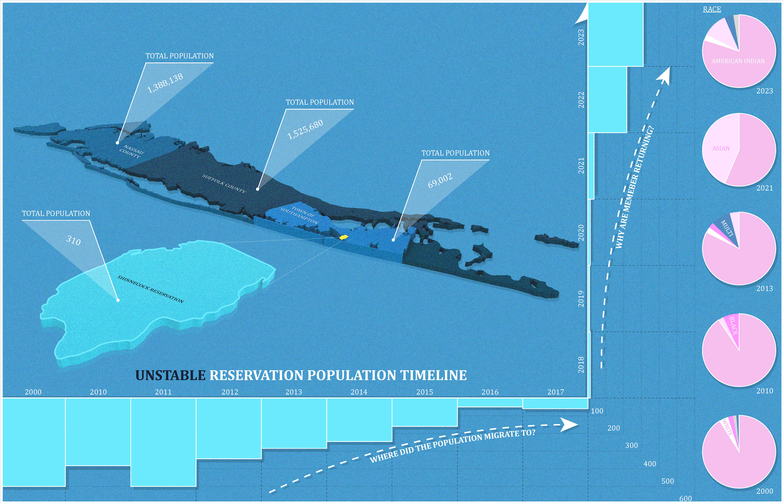In recent years, the reservation has faced unstable population totals. The reservation has also faced a decrease in child population percentage when compared to the total population, and an increase in the median age of the people living on the reservation.

We believe this could be due to the income pressures facing the reservation, where younger generations are moving away to find work, and the people struggling that are living on the reservation are having trouble sustaining families. This income disparity is due to a lack of local economy.

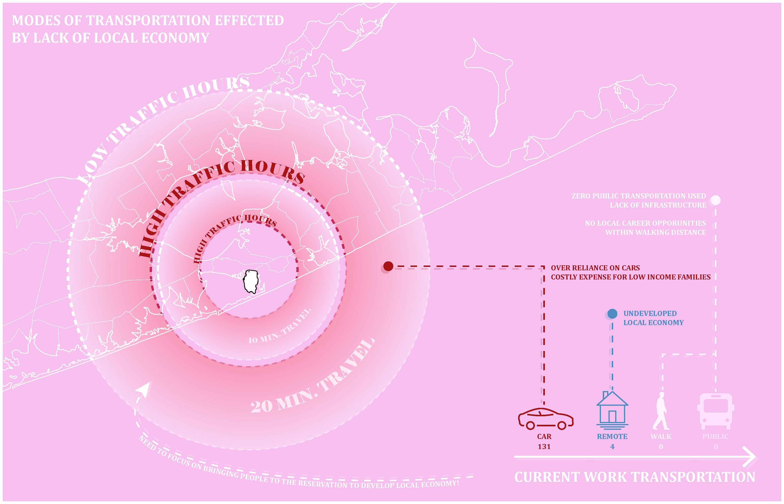This could be seen in the modes of transportation used by the people living on the reservation. Almost all of the employed workers that live on the reservation have to commute by car to get to work. There's no local career opportunities within walking distance, and there's an over-reliance on cars, which is a costly expense for low-income families. So how do we bring people back to the reservation and support future growth of the population? And more refined, how do we support the growth of the Shinnecock Nation through architecture?

The Shinnecock Nation has a lot of similarities to the architecture that's built on Nodeul Island in South Korea. There's a main intersection point in the middle of the island, similar to the Montauk Highway on the Shinnecock Reservation. We can use the Nodeul Island's blueprint for how they set up program density on the Shinnecock Nation when creating a master plan.

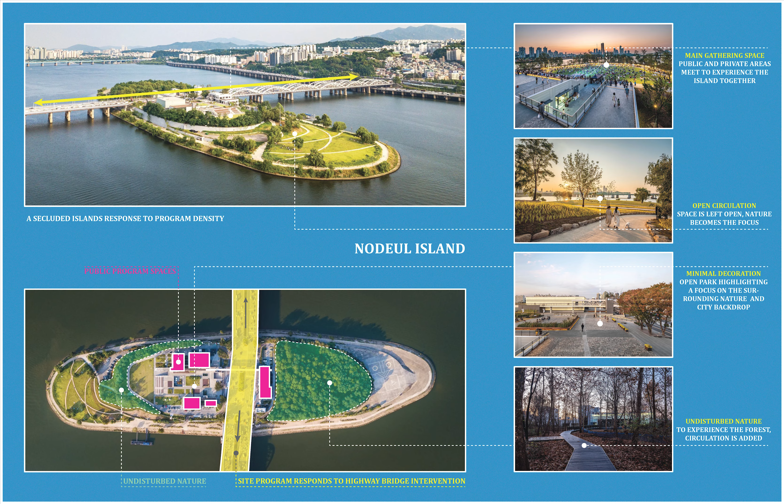As you can see, from the site intervention point in the center of the island, the main program density is larger closest to the site intervention. And as you move outwards towards the edge of the island, the forest density increases and it focuses more on creating circulation paths and undisturbing the nature, creating gathering spaces to actually experience this nature, and creating more privacy as you extend out towards the edge of the island.

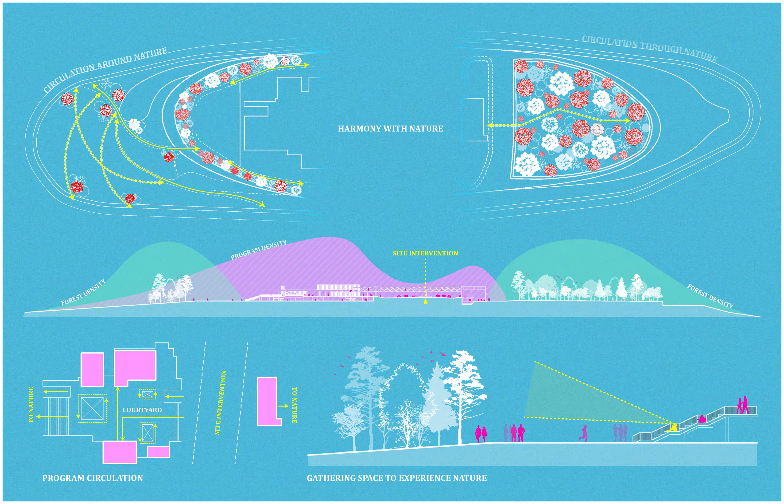When applying the same logic to the Shinnecock Nation, where we use the site intervention point of Montauk Highway, we can create a larger program density closer to the highway, focus on creating a commercial district that focuses on bringing people from the surrounding areas into the Shinnecock Nation to stabilize the local economy.

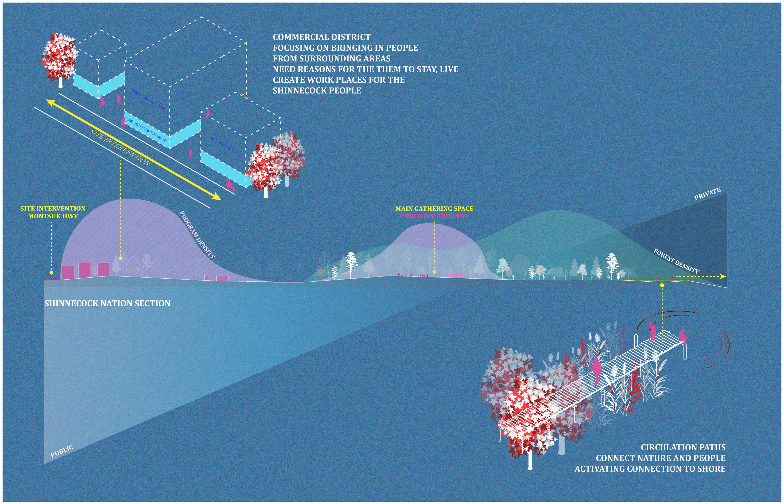And then as you move outwards towards the edge of the Shinnecock Reservation, you focus more on circulation paths and creating more privacy areas for the Shinnecock Nation to create a barrier between the outside people coming into the space and where they actually live. And then similar to the Nodeul Island, have a main gathering space where people from the outside and the people in the Shinnecock Nation can meet and gather and have events and share the space together.

This main gathering space, the powwow grounds, became the focal point of my design for this semester, as a starting point for the master plan.

When visiting the site, we noticed that there was undeveloped parking, non-permanent seating, and a worn performance center, creating this desolate condition for the powwow grounds. When not in use, the site is completely unactivated. So we're looking to change that.

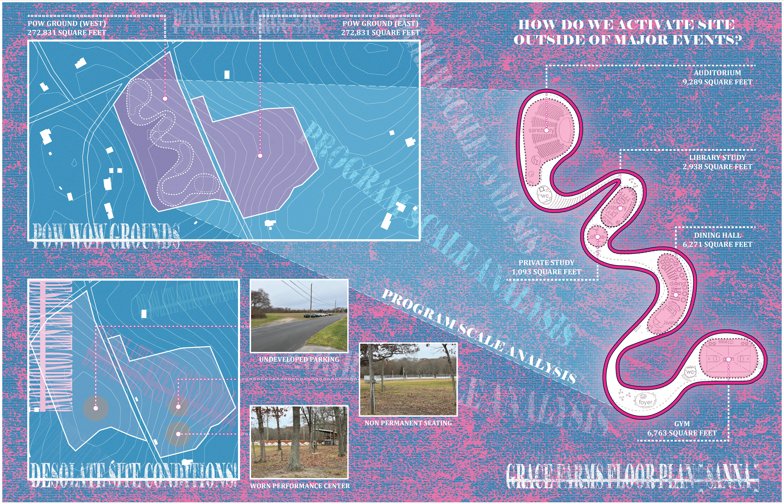So when thinking about how we're going to actually activate the space, we looked into the type of events that the Shinnecock Nation currently has, like the Shinnecock Powwow, Indigenous Day, Senior Clubs, the Oyster Festival.

Then we looked into other parks like Central Park, the High Line, and see what type of events that they hold that we might be able to incorporate into the program spaces at the powwow grounds, like stargazing, salsa bands, Halloween events, special screenings for artists, and craft making for children and families.

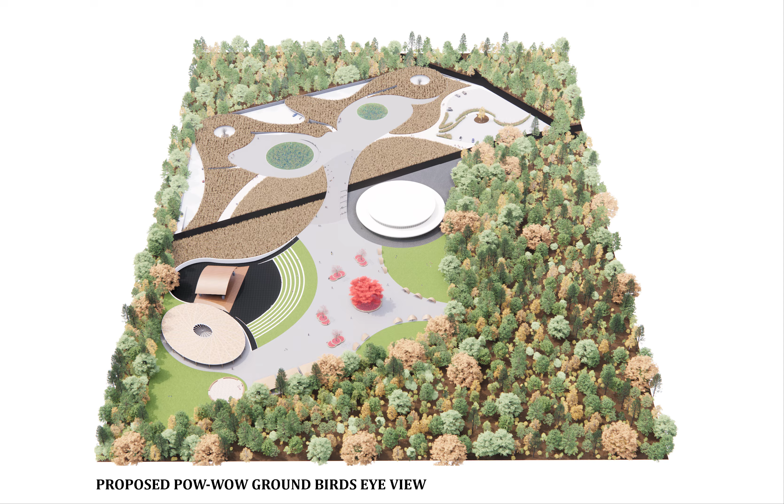We also completed a water runoff analysis of the current powwow grounds to help drive some of the design choices that we use for the space. We used all these factors when redesigning the entire powwow ground space.

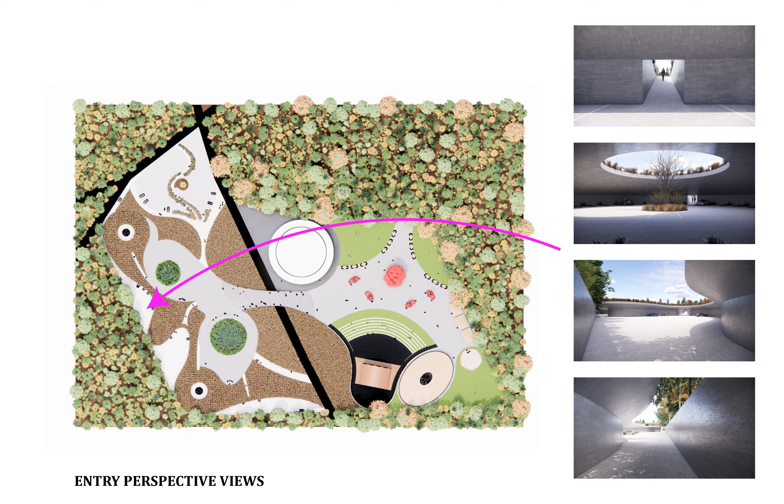We started by redesigning the west side of the powwow grounds. Instead of a flat, desolate parking area, we wanted to create an experience that people could travel through this space and experience it throughout the year. By creating these buried areas of parking, we allowed an experience of circulation entry into the park space. So the parking almost becomes part of the experience.

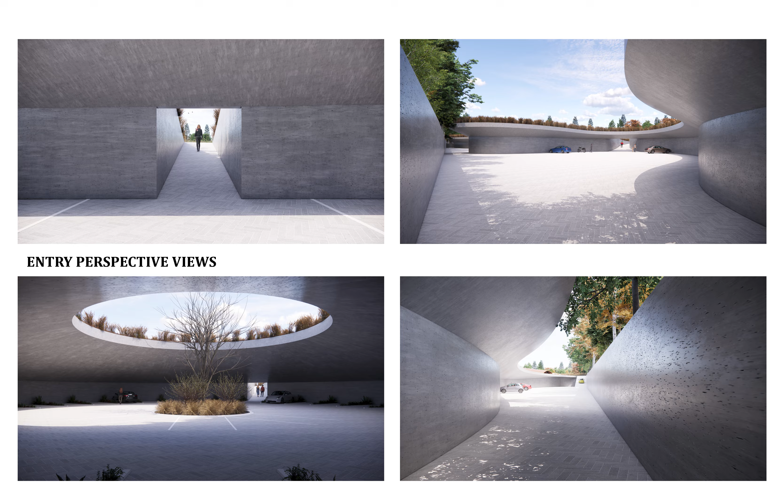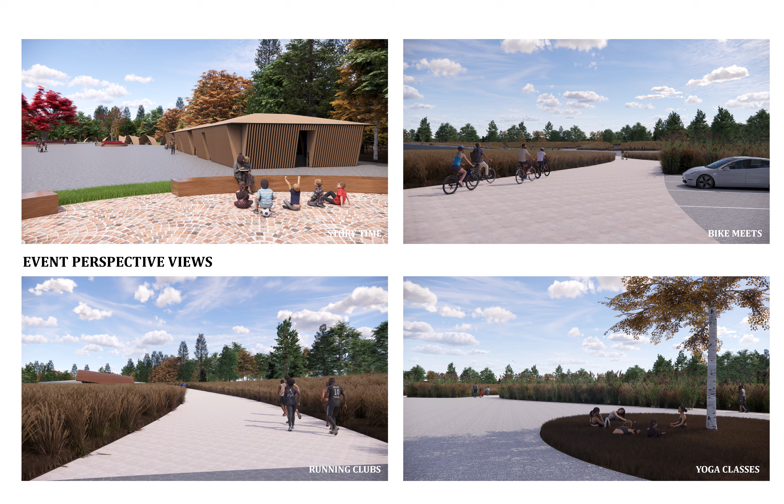By redefining this area, we create opportunities for people to create events like bike meets, yoga classes, running clubs, and story time. Other events in this area can include stargazing, defined areas for barter events, dance and wellness areas, and a place for people to experience alternative hobbies like skateboarding and rollerblading.

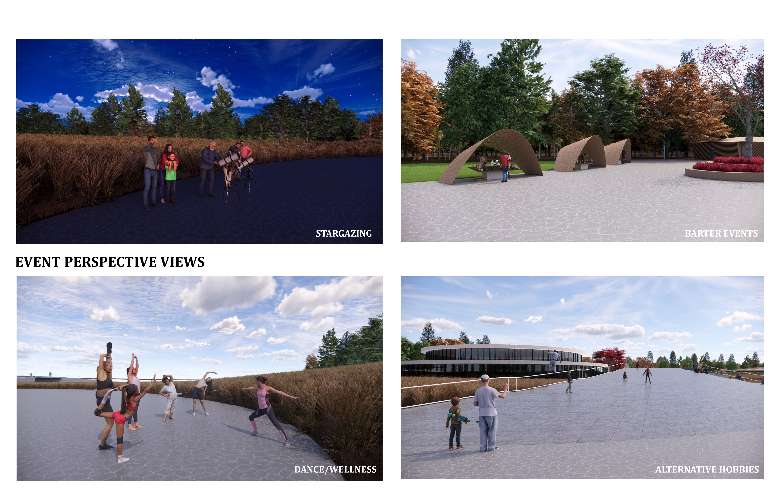Not only did we redefine the circulation spaces, but we created permanent seating areas like this amphitheater where people can experience the powwow grounds and different events throughout the year. By creating these meeting and resting areas, we create moments for people to gather and experience the space together.

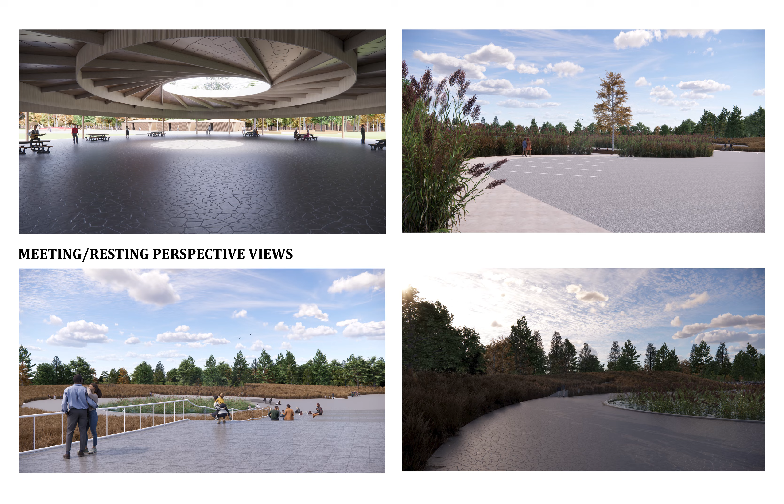We believe it's important to design the powwow grounds because it allows the Shinnecock Nation to gain ownership of this space and be proud of it. Thank you.